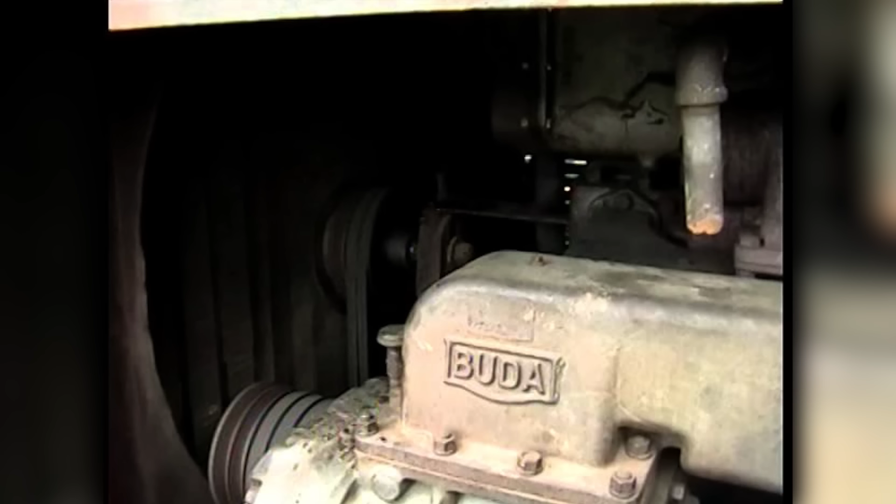At its peak, Buda was the second largest engine supplier in America, powering more than 110 different truck manufacturers and nearly 30% of all trucks on the road. Their engines powered fire trucks, wartime machines, and the tractors that helped feed the country. They employed over 2,000 workers and supplied engines to many manufacturers across American industry. But despite being an industrial titan that helped build modern America, the brand has since vanished into total obscurity. This is the rise and fall of Buda, how America's engine empire vanished.

Buda began in 1881 in a small Illinois railroad town that gave the company its name. George Chalender founded it there as the Buda Foundry and Manufacturing Company, building equipment for the railroads. That was the business of the era. America was laying track faster than it could count the miles, and every mile needed tools, hardware, and parts. Buda made them all, but the town of Buda, Illinois was never going to be big enough for what Chalender had in mind. By the early 1890s, the company had relocated to Harvey, Illinois, just south of Chicago, where the rail connections were better. That move changed everything.

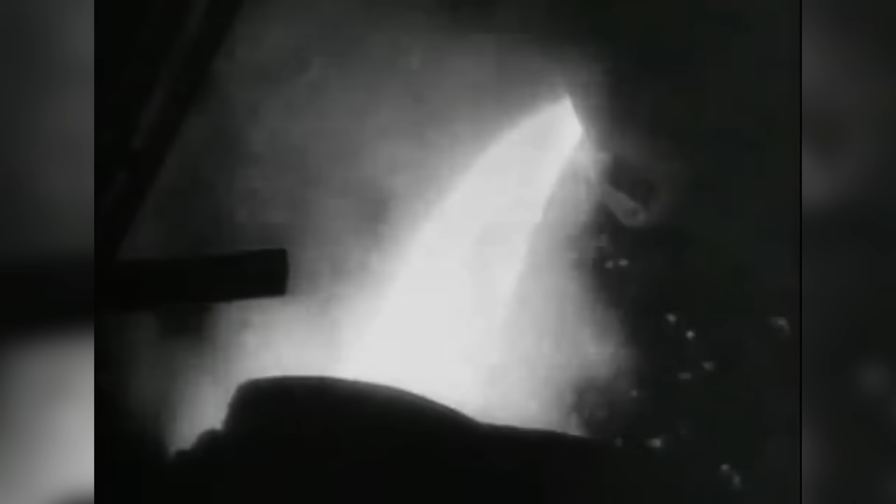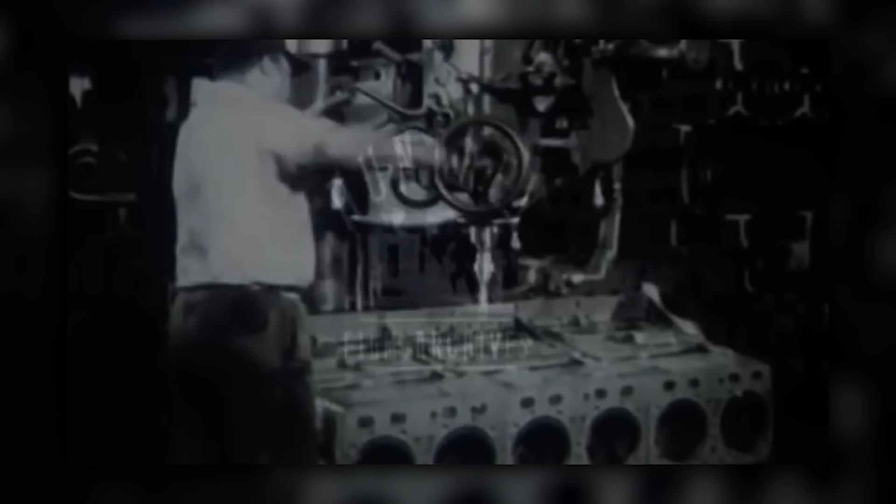Harvey was not just a better address. It put Buda inside the orbit of one of the most industrially dense regions in the country. Chicago and its surrounding communities were home to foundries, steel suppliers, machine shops, and a workforce that understood manufacturing. Freight lines ran in every direction. Raw materials came in easily, and finished product moved out fast. For a company that had been making railroad tools in a small town, the move to Harvey meant better and faster ways to move product in and out. It gave Buda the suppliers, the labor, and the shipping reach to stop thinking like a small rail supplier and start operating like a serious engine builder.

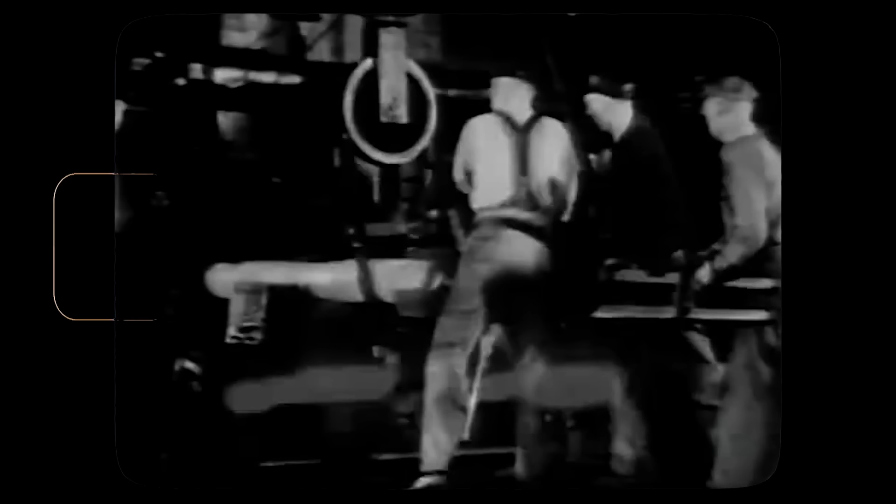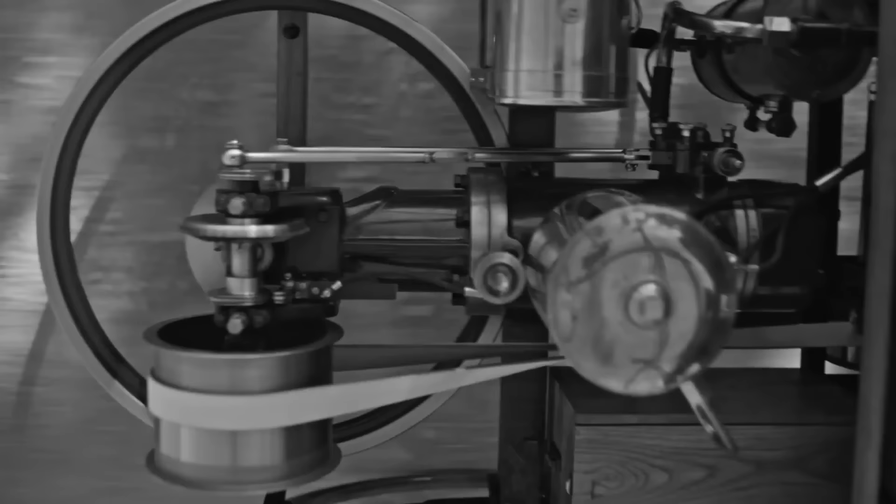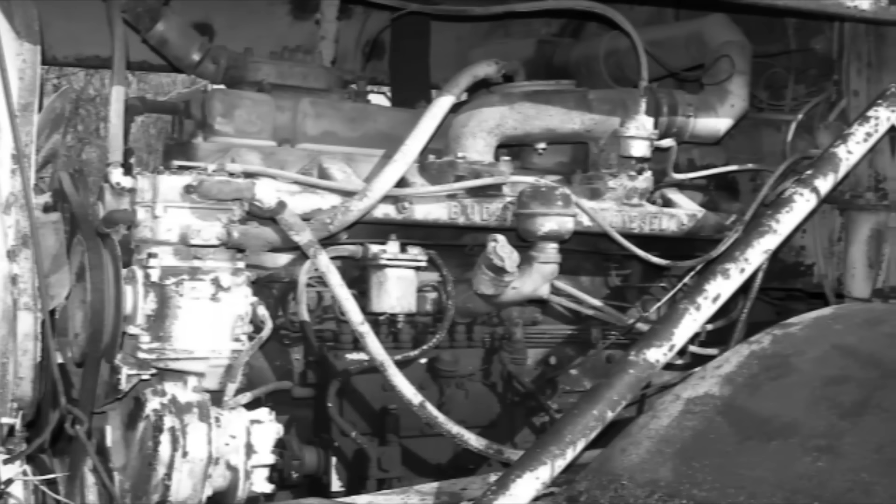Harvey gave Buda room to grow, and grow it did. By the early 1900s, the company had shifted its focus towards something more ambitious than foundry work. America was entering the age of the internal combustion engine, and Buda wanted to be part of it. The country was changing fast. Horses were giving way to machines. Farms needed mechanical power. Roads were filling with trucks. Railroads needed lighter, faster vehicles for inspection and maintenance work. Every one of those needs required an engine. Buda looked at that landscape and decided it was going to be an engine company. Not a truck company, not a tractor company, an engine company. That distinction mattered. It meant Buda's customers were everywhere, across every industry that needed power. And in the early 20th century, that was every industry there was.

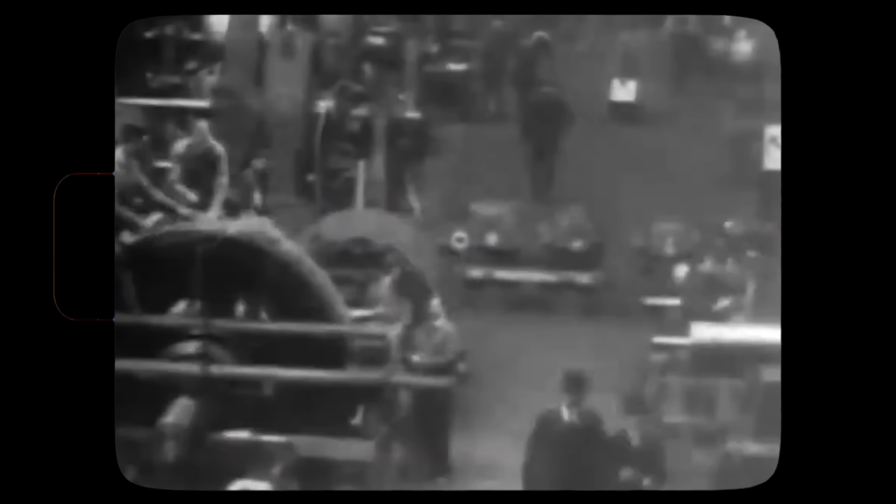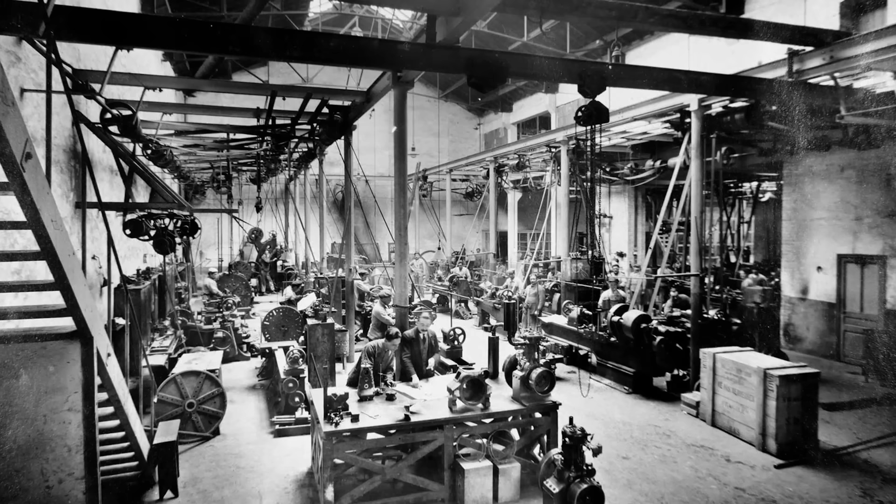The timing could not have been better. Buda was stepping into the engine business just as America was moving into a new mechanical age. More industries were beginning to depend on internal combustion, and that meant the demand for dependable engines was about to explode. For a company willing to focus on power instead of finished machines, the opportunity was enormous. Buda was not tying itself to one product or one market. It was placing itself at the center of a broader industrial shift, one that would create customers in every direction. A company that could build reliable engines and deliver them at scale suddenly had room to grow almost everywhere.

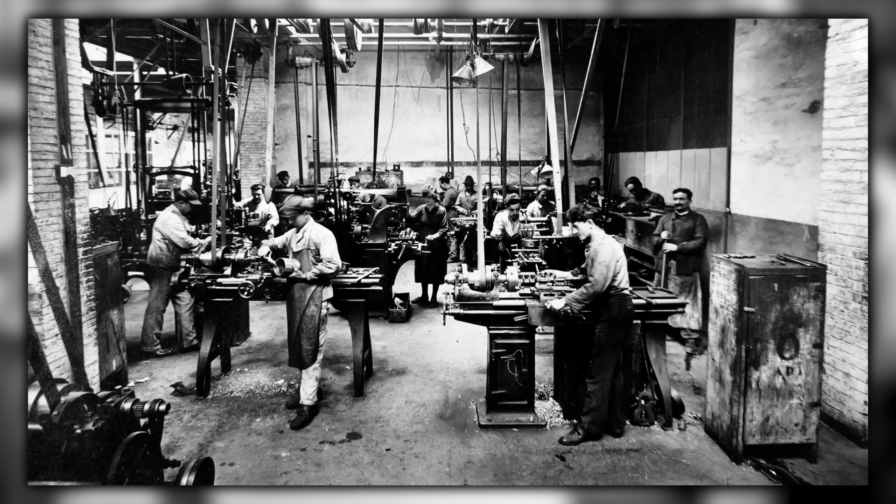By 1907, Buda was building gasoline engines for railroad motor cars. These were not glamorous machines. They were the workhorses of the rail world, small, rugged vehicles that carried inspectors down the line, moved crews between yards, and handled the unglamorous daily work that kept the railroads running. Buda built engines for these cars that became widely used across the industry. They were reliable, and they worked. That reputation for reliability was the foundation everything else was built on. But reputation does not build itself. It gets earned one application at a time, in real conditions, under real pressure.

The railroad motorcar business gave Buda exactly that kind of proving ground. These engines did not sit in controlled environments. They ran in heat, in cold, on rough track, in remote locations where a breakdown meant real consequences. They were maintained by workers who needed them to start and run without drama. Every mile those engines covered without failing strengthened Buda's reputation. Word spread the way it always does in industries built on equipment, through the people who used it and the people who fixed it. Mechanics talked, purchasing managers compared notes. Fleet operators asked what other operators were running. Buda's name kept coming up as the answer. That kind of reputation is slow to build and almost impossible to fake.

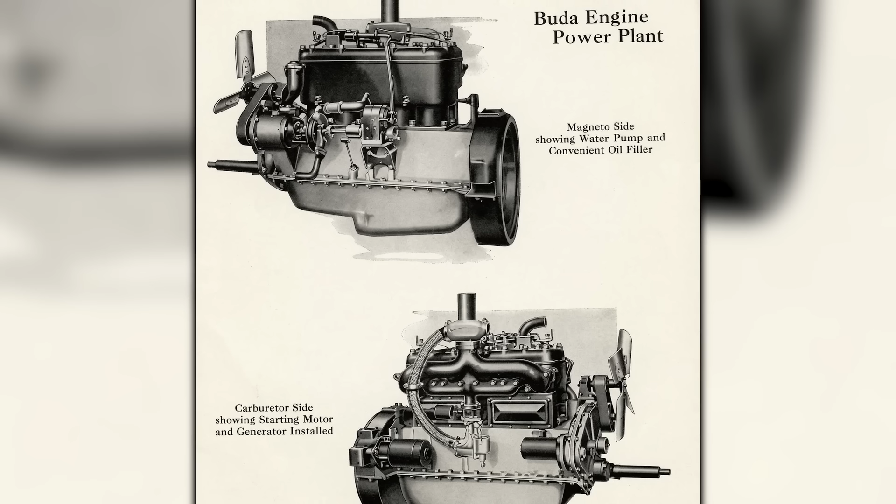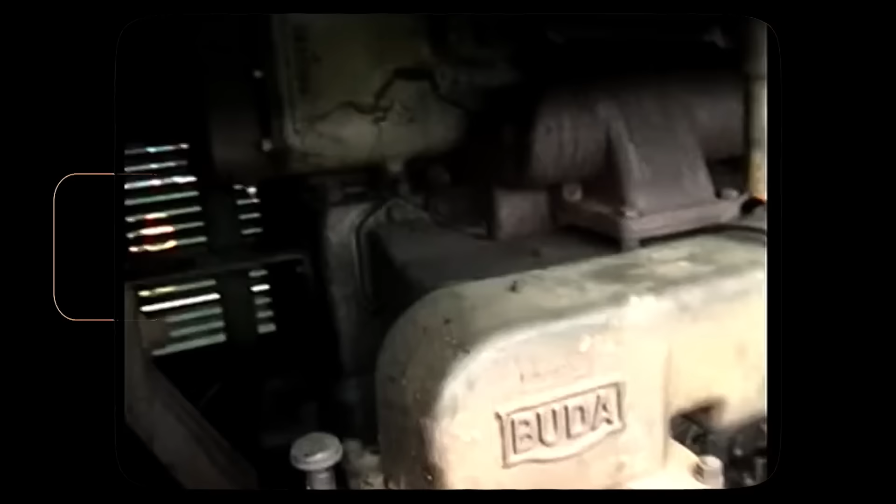By the time Buda started expanding into trucks and agricultural equipment, it was not introducing itself to a skeptical market. It was walking into rooms where people already knew what it could do. That made every new customer relationship easier to start and harder for a competitor to break. By then, Buda was no longer proving it could build engines. It was proving how many places those engines could go. Railroads needed them. Truck builders needed them. Fire apparatus makers and farmers needed them. The more industries mechanized, the more valuable Buda's position became.

It was not tied to one machine or one market, which meant every new sector that adopted engine power created another lane for the company to grow.

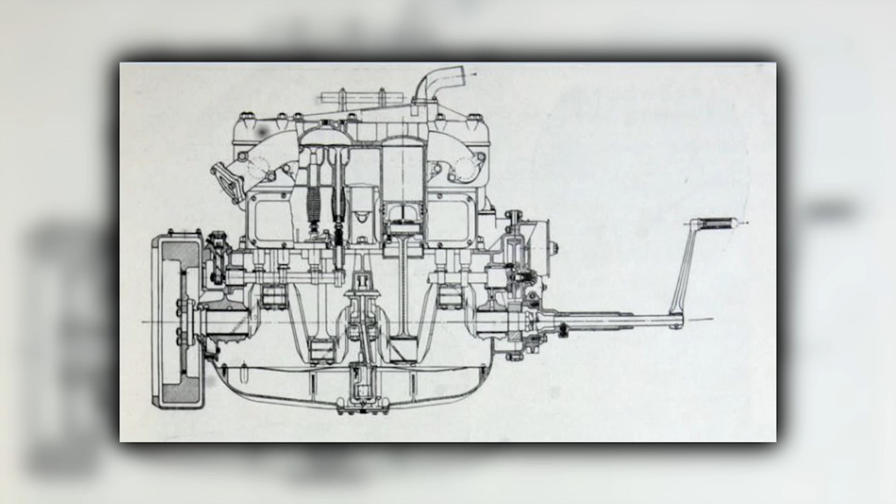From there, Buda expanded into trucks. When Kenworth began building trucks in the early 1920s, its early models commonly used four-cylinder Buda engines. That relationship lasted into the 30s, when Kenworth was offering Buda six-cylinder gasoline engines as well. Kenworth would go on to become one of the most respected names in American trucking. In those early years, Buda was the engine behind it.

Fire apparatus builders came next. Seagrave fire apparatus used Buda engines. American LaFrance used them too. These were the fire trucks protecting American cities, and Buda was under the hood.

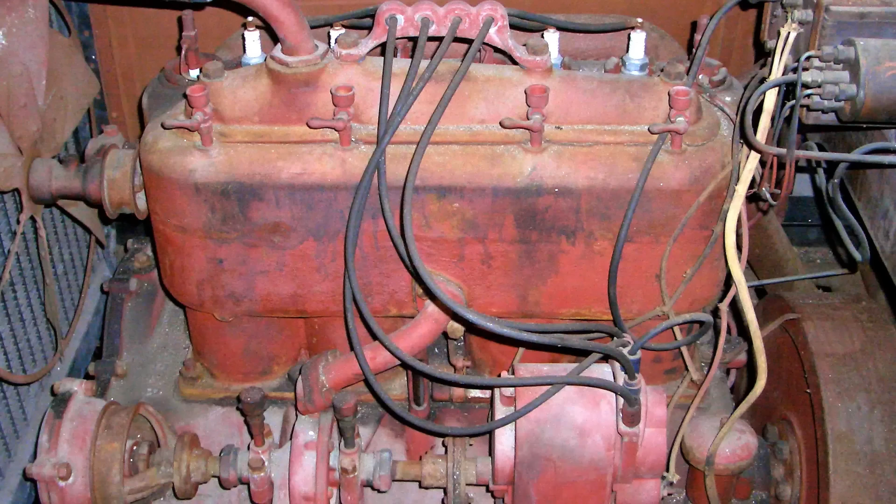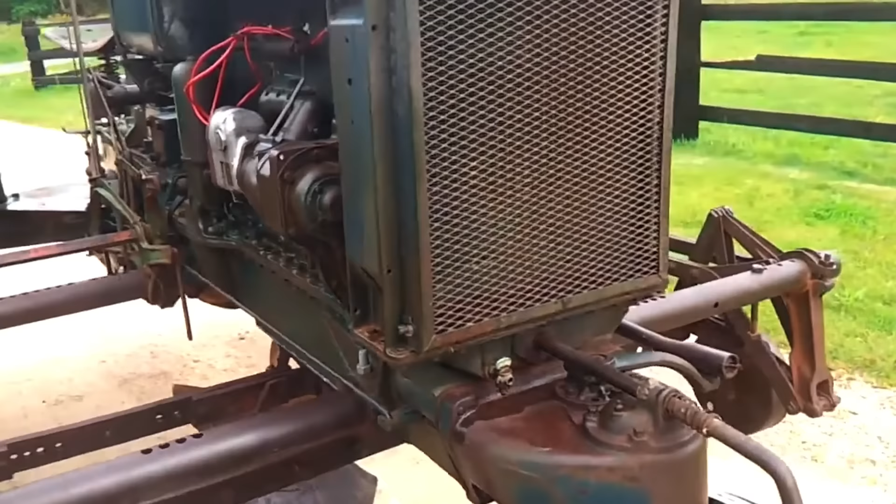In agriculture, their engines were used in tractors from brands such as Oliver, and in other farm machines as well. The Oliver 80, one of the most recognizable row crop tractors of its generation, was offered with a Buda diesel option. Fewer than 150 of these diesel units were ever produced, making them incredibly rare today. But their existence proved that major tractor manufacturers trusted Buda enough to power their flagship machines.

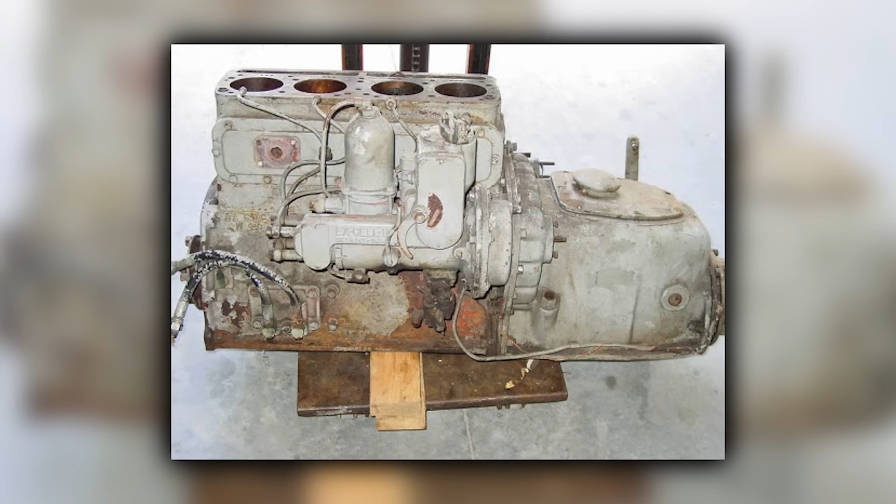That reach across so many different industries was not an accident. It was the direct result of a business model that most companies never attempt. Buda did not need to own the whole machine. It only needed to own the part that made the machine useful. A tractor without a dependable engine is an expensive piece of iron sitting in a field.

A freight truck without an engine that holds up over long miles is a liability, not an asset. Buda understood that the engine was the one component no manufacturer could afford to get wrong, and it built its entire identity around being the company that got it right.

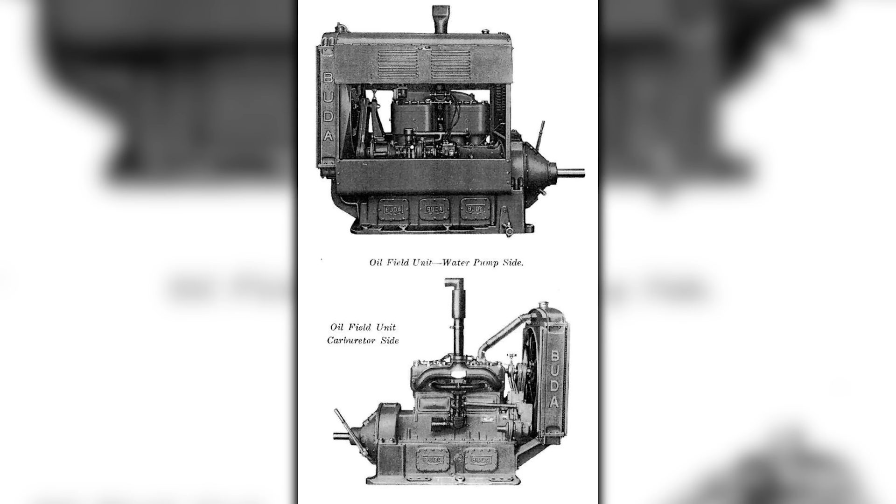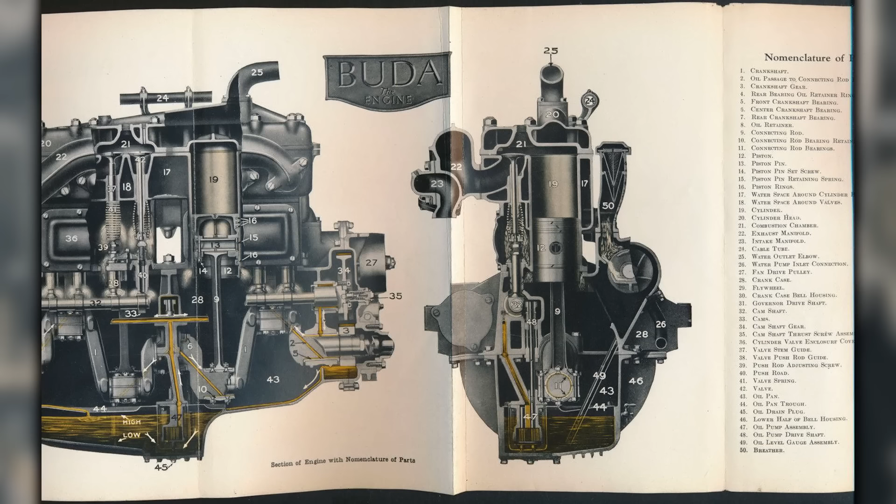That meant its customers were spread across industries that had almost nothing else in common. A fire apparatus builder and a tractor manufacturer and a railroad operator were not competing with each other. They were all just looking for the same thing, an engine they could trust. Buda could serve all of them at once, which meant its fortunes were never tied to the health of any single market. When one industry slowed, another was often growing.

That kind of diversification was not just smart business. It was structural protection that most of Buda's competitors never had.

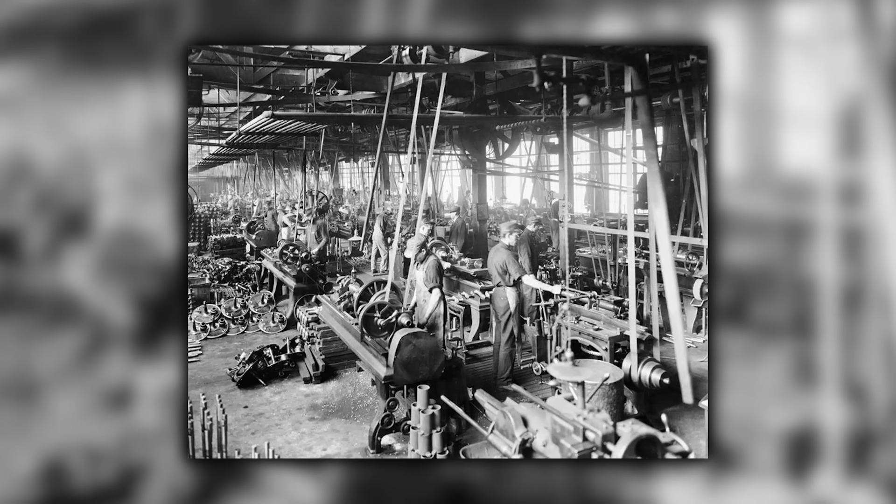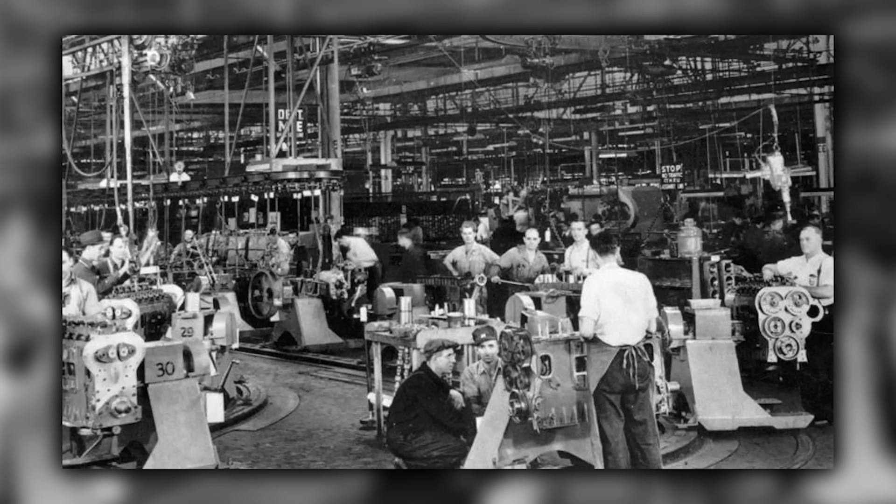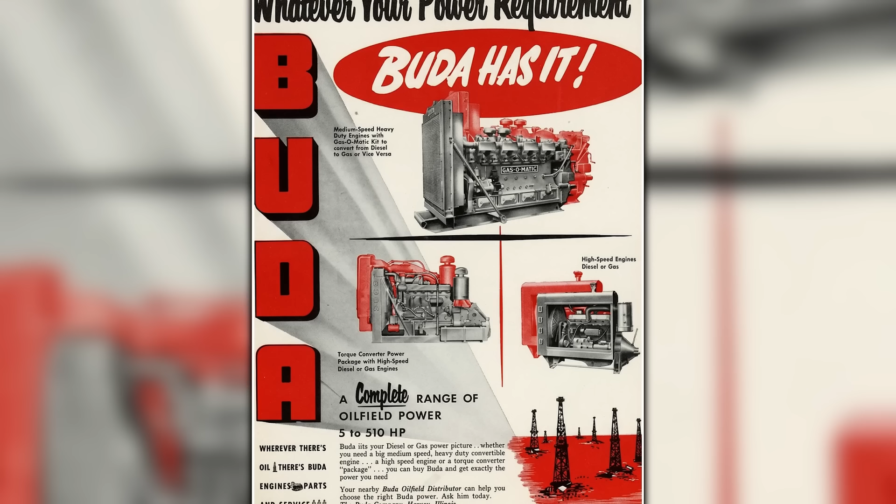At the height of World War I production in 1917, the Harvey plant had around 2,400 workers, with about 1,500 working directly on engines. By 1922, the plant still employed roughly 1,900 men. By the mid-20s, Buda was producing a wide range of engine types in multiple sizes, serving customers across trucking, agriculture, fire apparatus, marine, and industrial work. At its peak, Buda was not just a supplier, it was the engine underneath a significant share of American commercial life. By that point, Buda had already proven it could supply power to a country that was mechanizing fast.

But the industry was not standing still, and neither was the engine itself. Gasoline power had helped build Buda's name, yet heavier trucks, harder industrial work, and longer operating hours were pushing the market toward diesel. Diesel engines offered stronger low-end pulling power, better fuel economy, and the kind of durability that mattered when machines were expected to work all day under load.

Buda could see that shift coming. The company had spent decades building its reputation on dependable power, and now the next test was whether it could carry that reputation into the diesel age before larger competitors locked up the future. And they were not standing still.

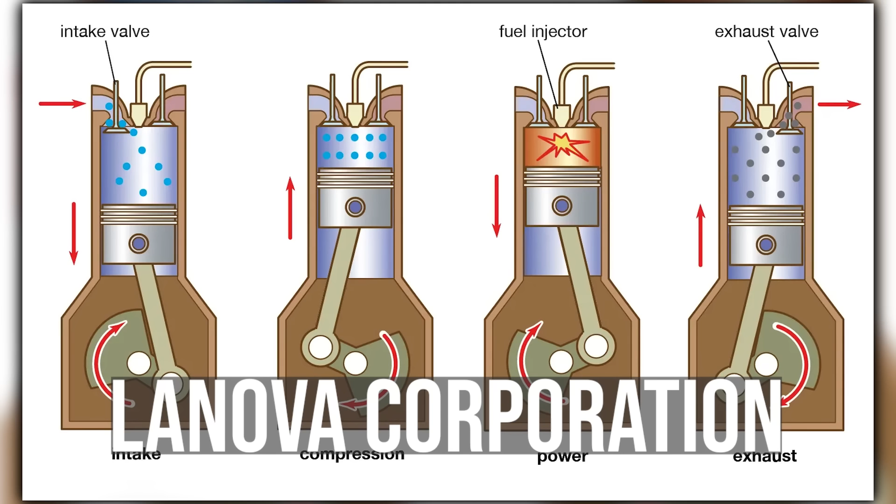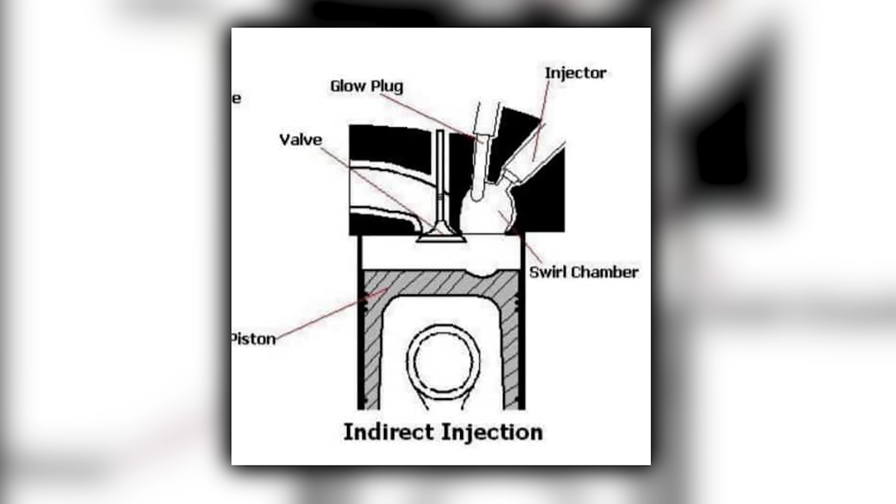In the 30s, the company licensed a diesel combustion technology from the Lanova Corporation and began building what became known as the Buda-Lanova diesel engine. The Lanova system used an indirect injection divided combustion chamber with a small energy cell where fuel ignited to create a high-pressure blast, forcing a controlled double swirl of turbulence back into the main cylinder for a smoother, quieter burn than any other diesel of its day.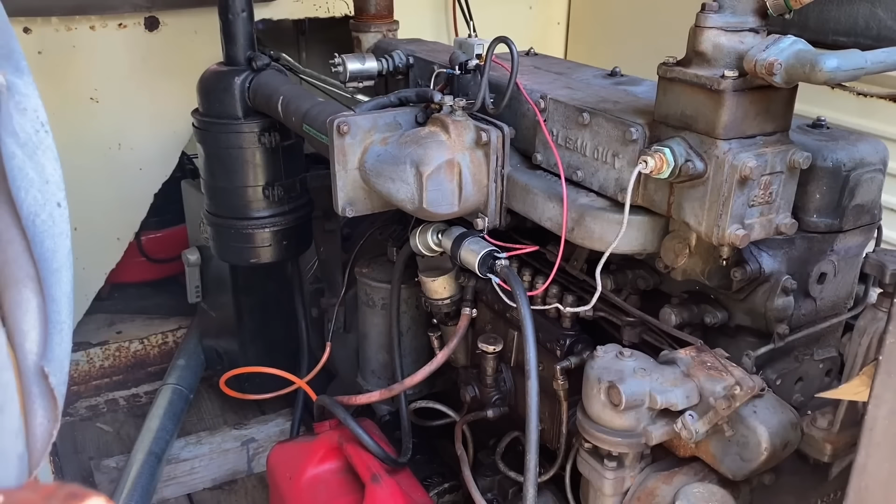The result was an engine that delivered remarkably refined and reliable power in the industrial and commercial work Buda was already serving. It was a deliberate move into a technology that was reshaping the industry. Buda saw where things were going and adapted.

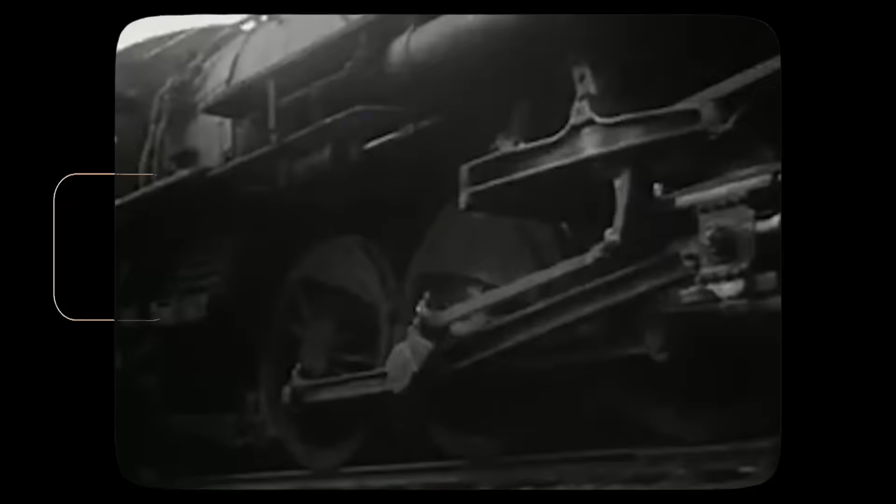For a moment, the war years made it look as if Buda had secured its place for good. During World War II, the company supplied engines for military locomotives used by the U.S. Army, built to demanding specifications and tested before they left the plant. Buda also produced large engines for heavy-duty locomotive applications. The company earned the Army-Navy E Award for Excellence, a prestigious honor they would go on to win 5 times during the conflict, a feat achieved by very few American plants.

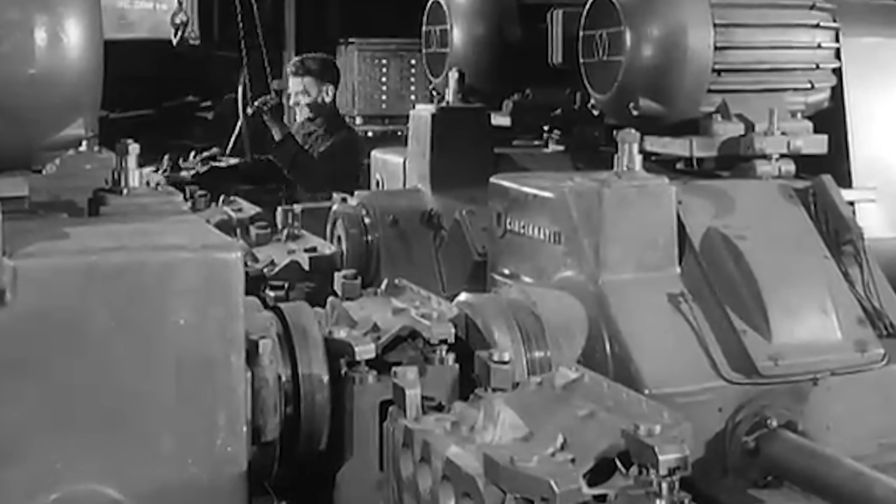But wartime demand had masked something important. It had made Buda look bigger than ever, but it also hid how vulnerable the company had become. Once the war ended, the market stopped rewarding simply being reliable and started rewarding whoever could move fastest, scale widest, and fund the next generation of engine development. That was the kind of fight independent builders almost never won.

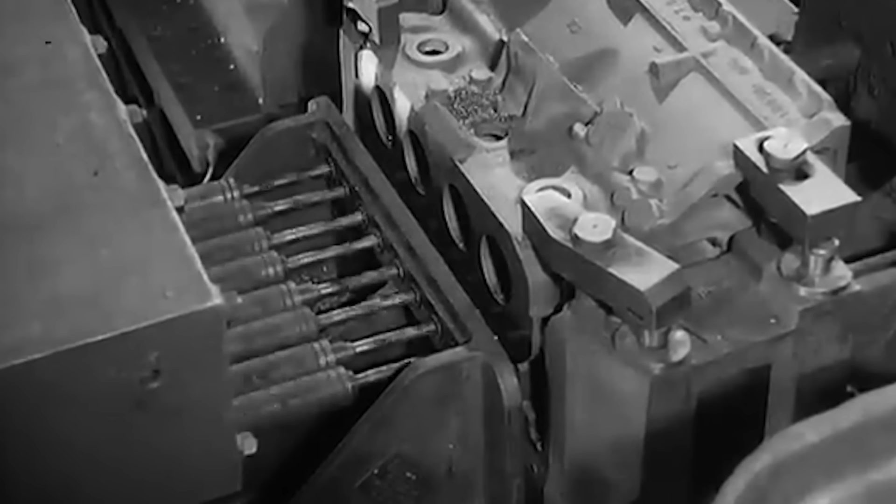The conditions that had allowed Buda to thrive, a fragmented market, loyal customers, and limited competition, were about to change permanently. The post-war world was going to be a different kind of fight.

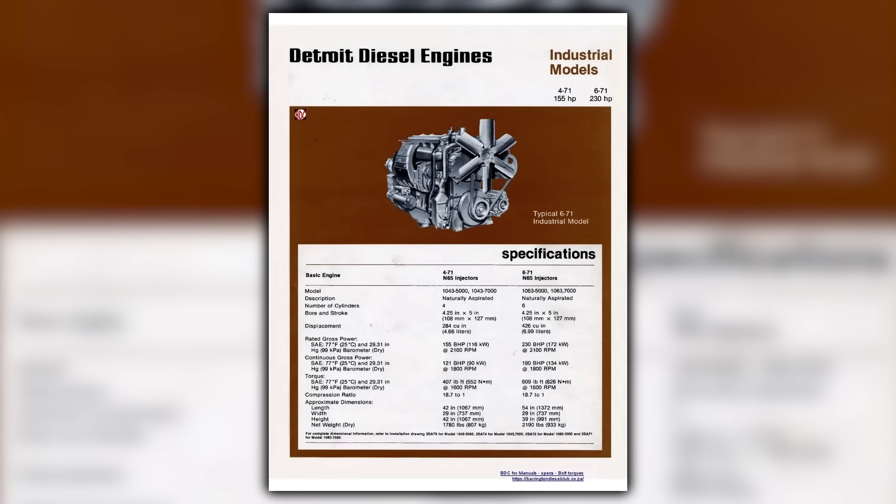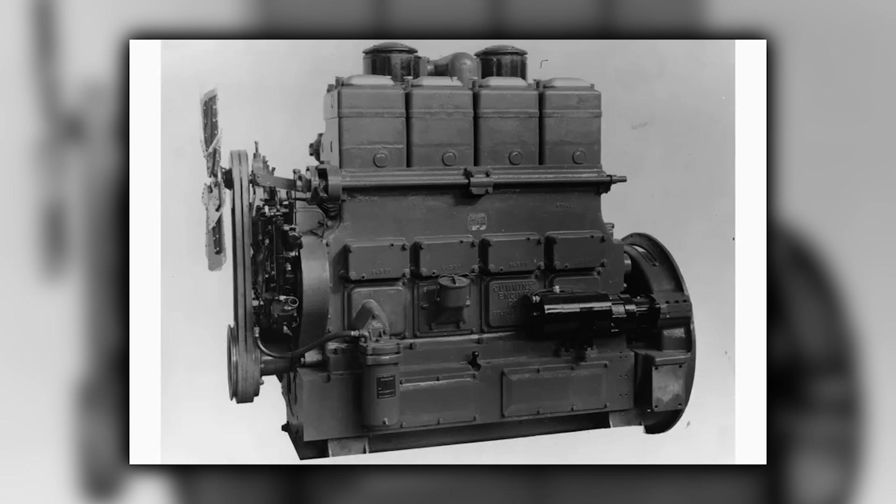Detroit Diesel had introduced its 6-71 engine in 1938, and by the post-war years, it was becoming the dominant force in commercial diesel applications. The 6-71 was a 2-stroke engine, simple to maintain, durable, and backed by the resources of General Motors. Cummins was building its reputation in long-haul trucking, with engines offering strong fuel economy and reliability over hundreds of thousands of miles.

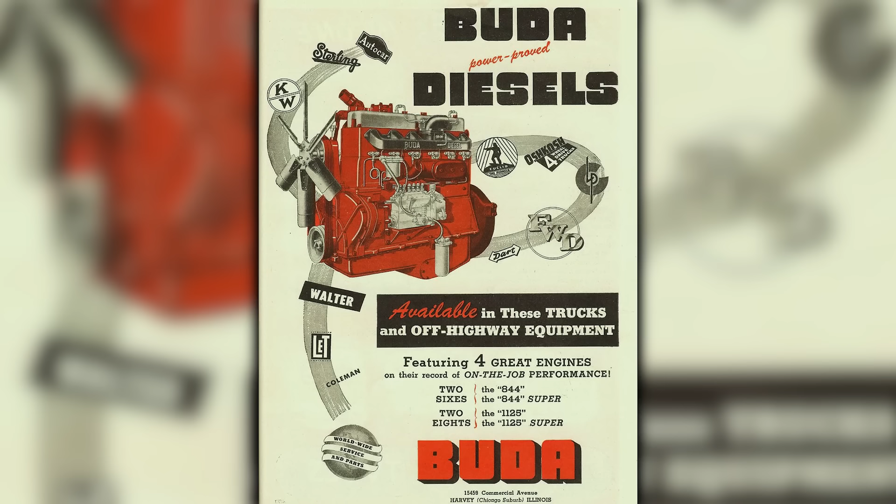Caterpillar was moving into diesel with the weight of a company that had been building heavy equipment for decades. Buda was competing against all of them as an independent company with a single plant in Harvey, Illinois. The imbalance was impossible to miss.

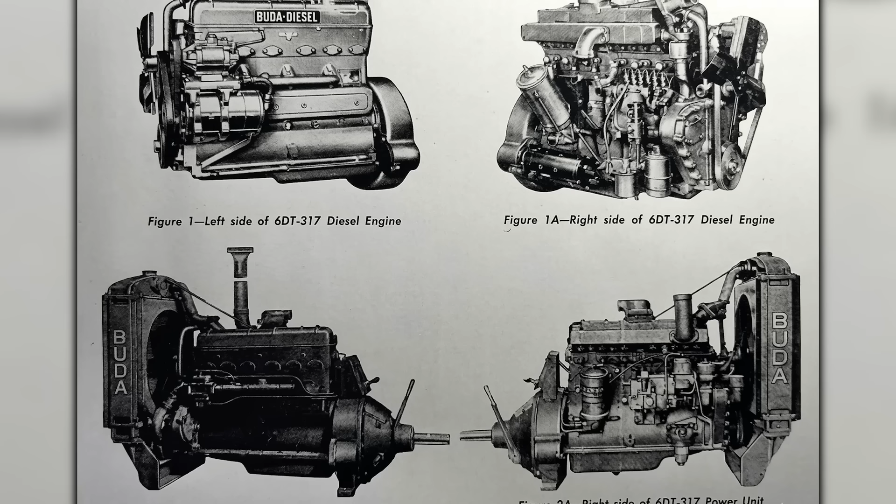Detroit Diesel had General Motors behind it. Cummins had deep relationships with the major truck manufacturers. Caterpillar had a distribution network that stretched across the country. Buda had its reputation, its engineering, and its loyal customer base. For a while, that was enough.

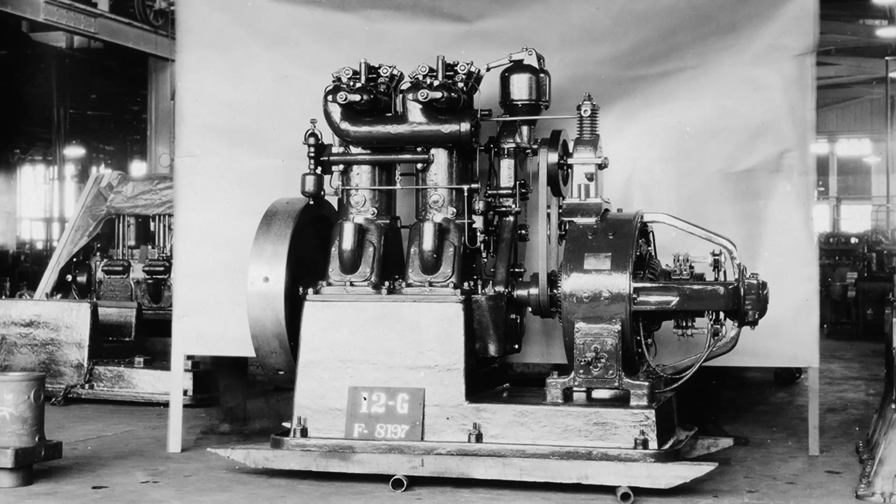But the market was consolidating fast, and the companies that survived were the ones with the deepest pockets and the broadest reach. The era of the standalone engine company was ending, and there was nothing any of them could do to stop it. The companies pulling ahead were winning because they had resources that Buda could not match, not because they had better engineers.

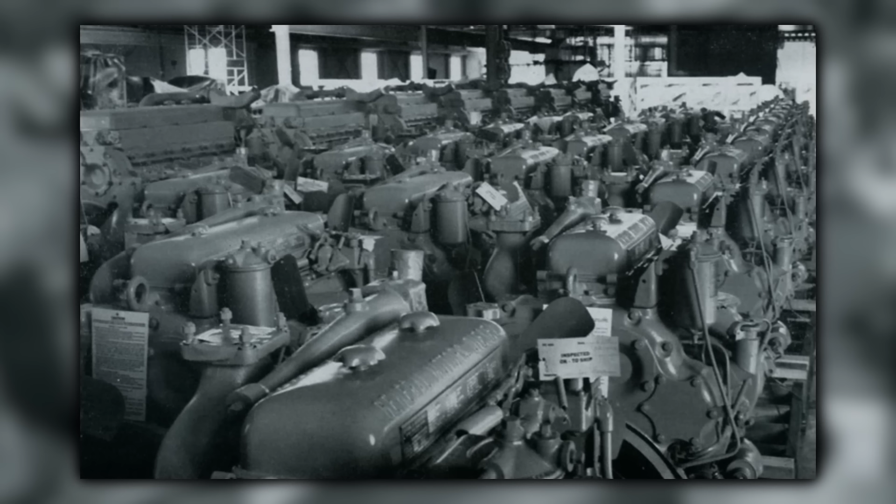Detroit Diesel could fund years of development on a new engine platform and absorb the losses while it waited for the market to catch up. Cummins could build deeper relationships with major truck manufacturers and strengthen its hold on key customer segments. Caterpillar could build dealer networks across the country that put trained technicians and spare parts within reach of almost any operator.

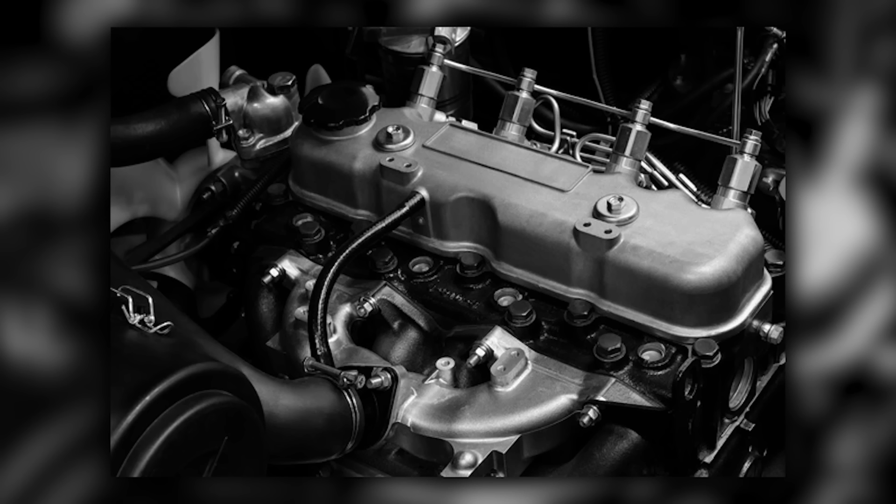These were not engineering advantages, they were structural ones, and they compounded over time. Every year a larger company spent building its distribution network was another year Buda fell further behind in reach. Every new engine platform a well-funded competitor developed was another product Buda could not match without capital it did not have. The gap was not dramatic at first. It widened slowly, the way these things always do, until one day the distance was too large to close.

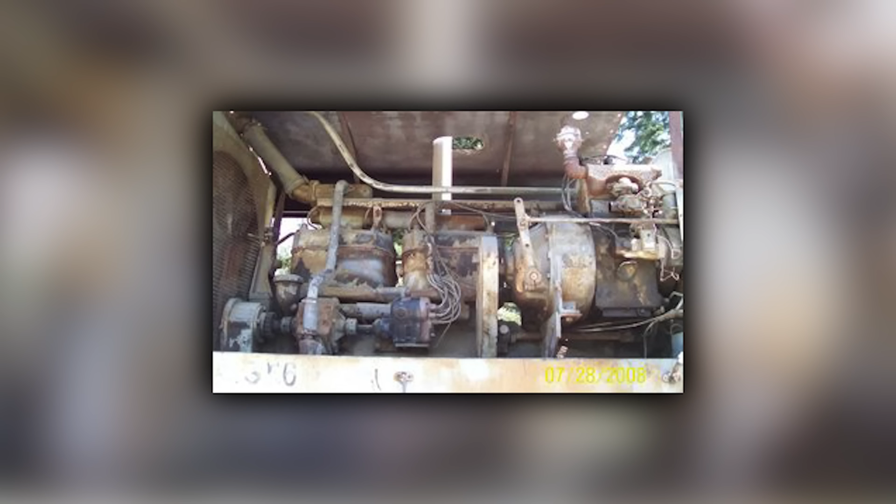Buda had not changed. The industry had changed around it, and the company that had once been perfectly positioned was now standing in the wrong place. For Buda, that was the trap.

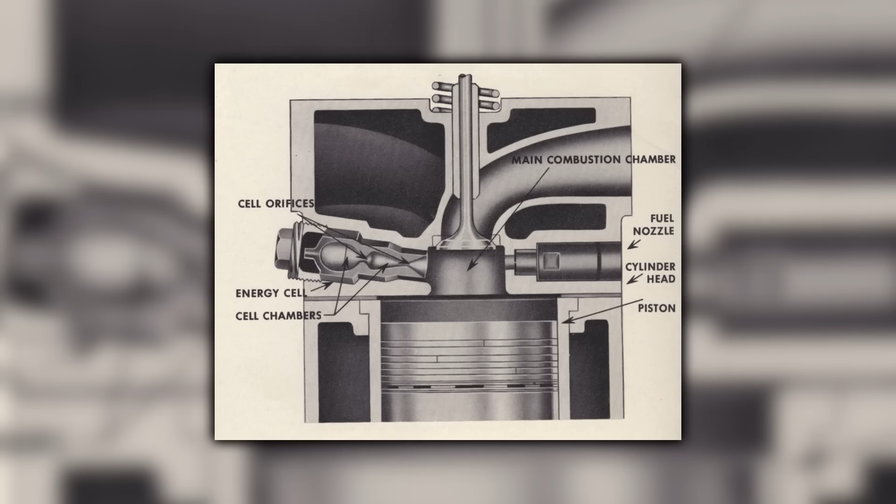Its engineers still knew how to build a reliable engine. Its customers still trusted the product. But the strengths that had carried Buda through the first half of the century were strengths built for an earlier market. There was also a technical problem building quietly underneath Buda's diesel business.

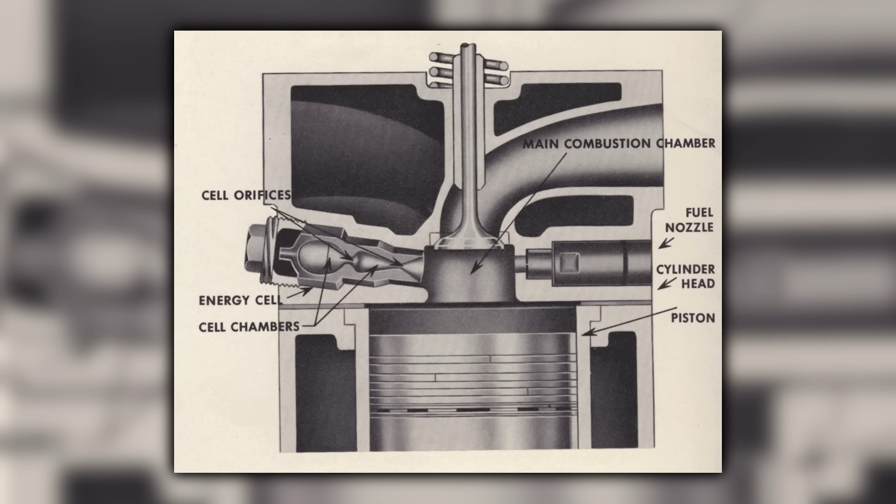The Lanova system was an indirect injection design that worked well at moderate speeds, but it was eventually outclassed by newer direct injection designs that offered better thermal efficiency, more power per unit of fuel, and a simpler engine overall. The very thing that had made Buda's diesels distinctive was becoming a liability.

Adapting required investment, and investment required resources that an independent engine company of Buda's size was increasingly hard-pressed to generate. Every year that passed without a modern direct injection platform was another year that the more efficient, high-output designs from Cummins and Detroit Diesel pulled further ahead.

Then came the decision that ended Buda as an independent company. In 1953, Allis-Chalmers acquired Buda to secure a diesel engine supply of its own. But what was a strategic solution for Allis-Chalmers was the point of no return for Buda. 70 years of independent identity, of building engines under its own name for its own customers, ended with that transaction.

Buda did not choose this outcome. It arrived because the company had been squeezed from every direction, by competition it couldn't match at scale, by technology it couldn't afford to replace fast enough, and by a market that had reorganized itself around companies far larger than Buda had ever been. The acquisition was not a rescue. It was an absorption.

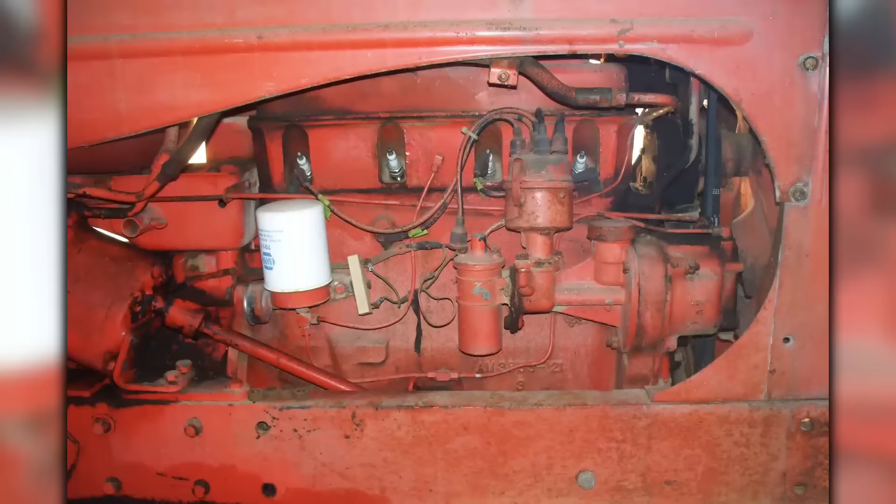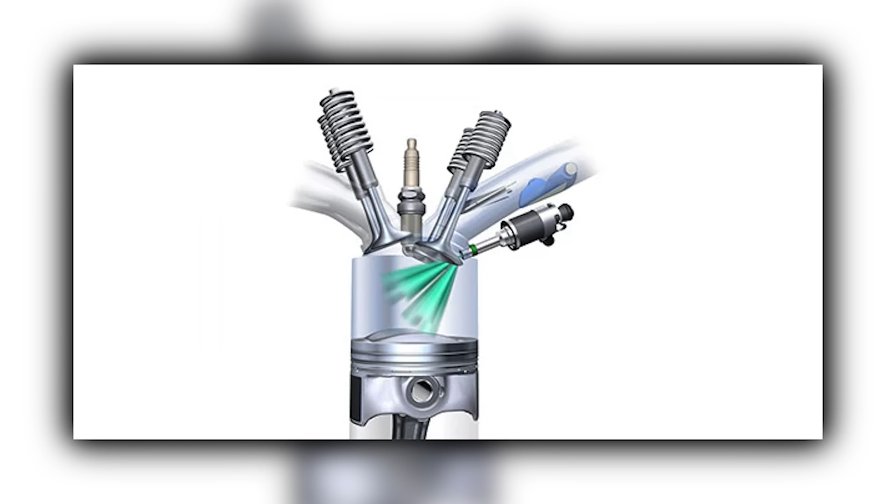For Buda, the acquisition meant the end of independence. Almost immediately, Allis-Chalmers rebranded the engines under its own label, systematically stripping away a name that had taken 70 years to build. The distinctive Lanova combustion system was phased out in favor of direct injection. And while the redesign was arguably the right engineering decision, the identity that made Buda what it was got absorbed and overwritten.

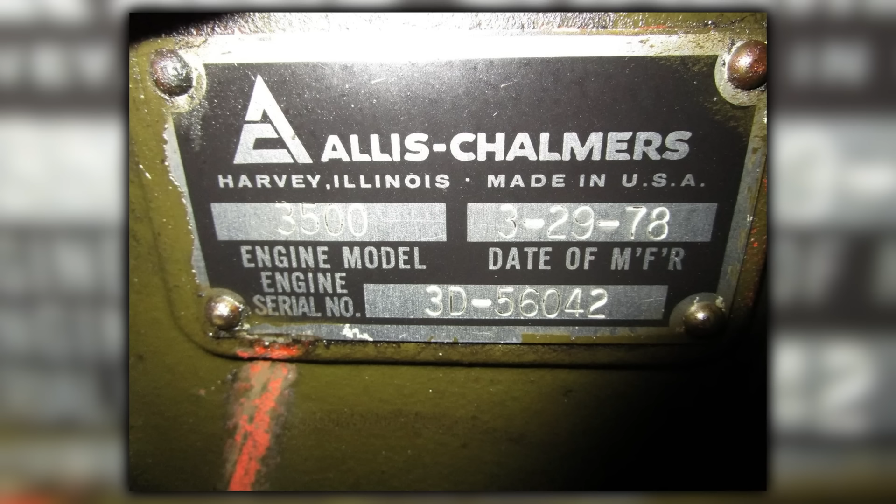The Harvey facility simply became the Allis-Chalmers diesel engine plant. Buda's disappearance wasn't a collapse. It was purely administrative, an industrial empire folded into a new corporate identity almost overnight.

Before long, Allis-Chalmers began to unravel too. Through the 70s and 80s, the company was hit by the farm crisis, rising competition from John Deere and International Harvester, and mounting financial losses. It shut down tractor production in 1985. By 1987, it had filed for bankruptcy.

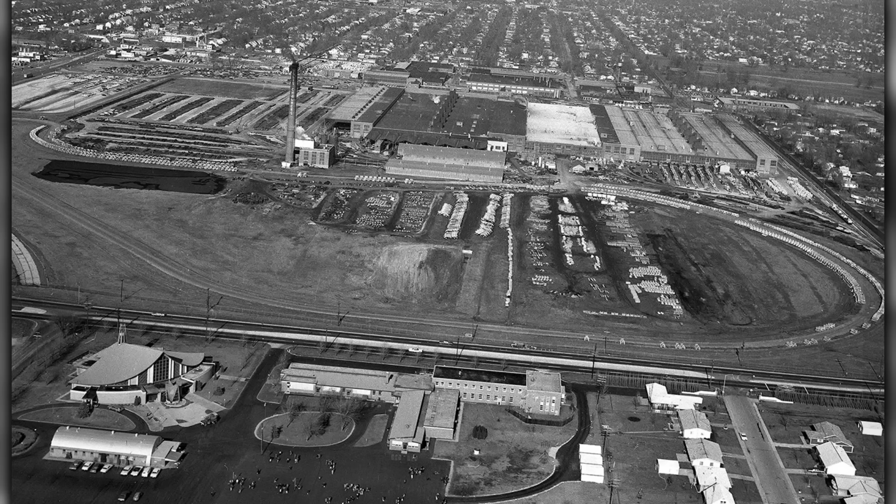The agricultural business was sold off. The construction business was sold off. The Harvey plant passed through a succession of owners until the assembly lines finally went silent, and the Buda name, already faded, vanished into the background of industrial history.